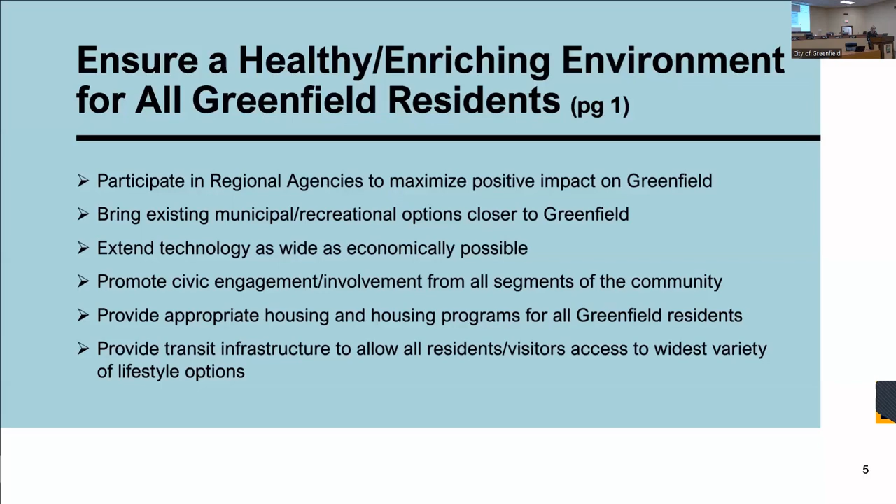The city is maintaining parks in best practice forms, offering a wide range of sports and recreation programs for youth and adults, offering a wide range of educational and cultural programs for youth and adults, and pursuing green initiatives that are sustainable and eco-friendly. The city is providing a healthy, clean environment in which to live and providing community outreach efforts to secure resources and help those in need.

The city hires the best qualified employees, balanced with the desire to hire local people that are also bilingual. We are striving to keep training existing employees to be first-in-class service providers and follow best practices with personnel policies and procedures.

The city is increasing and maintaining transparency between all staff, leaders, and the public, implementing best practices for all internal processes, putting all city assets to the highest and best use, and enhancing revenue sources.

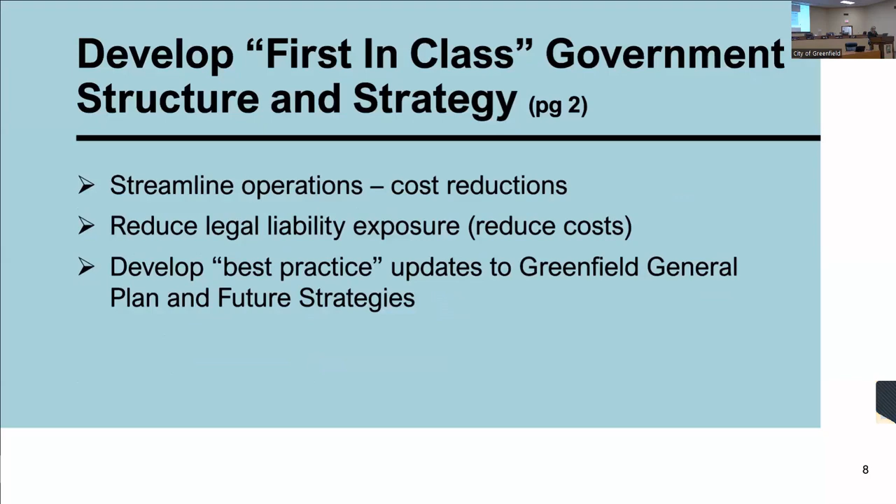The city is also streamlining operations in order to provide cost reductions and efficiency. We're looking at reducing legal liability exposure and developing best practice updates to the Greenfield General Plan and future strategies.

I'm here tonight to talk about water and wastewater. So for our utility overview, we have a wastewater collection and treatment system, and we also have a water supply and distribution system.

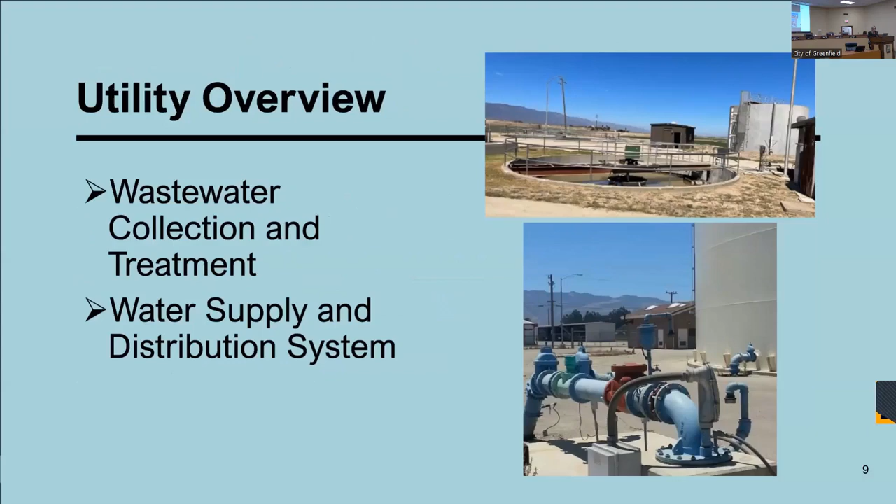I'm going to talk first about our wastewater collection system. The city has an ongoing wastewater master plan. It's a dynamic document, and the last update we did on that was in May of 2021. It prioritizes current and future collection system needs.

The city provides service to just over 3,800 customers who are connected into the sewage system. It also provides a prioritized list of recommended projects with associated budgets.

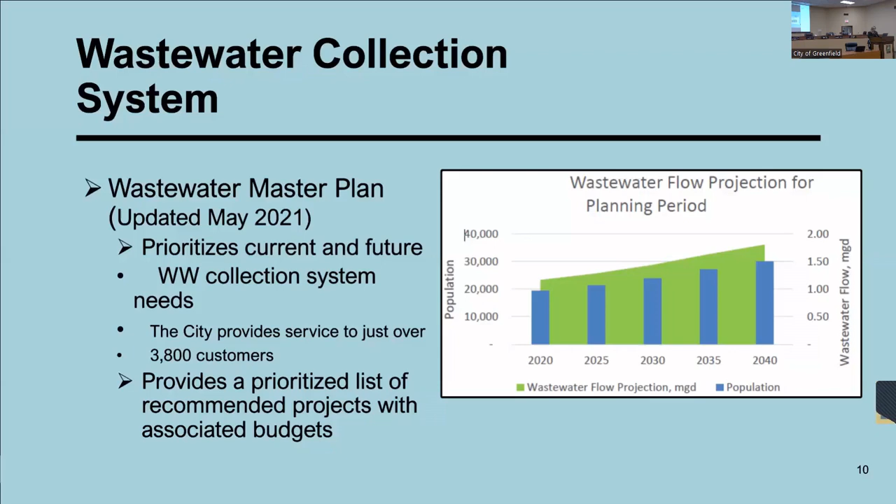There are different components to the wastewater collection system. As I mentioned, there's over 3,800 private lateral connections from properties to the sewer mains. There's a total of about 31 miles of sewer main line, ranging in size from 4 inches to 24 inches in diameter. We have 6 wastewater lift stations and countless sewer manholes.

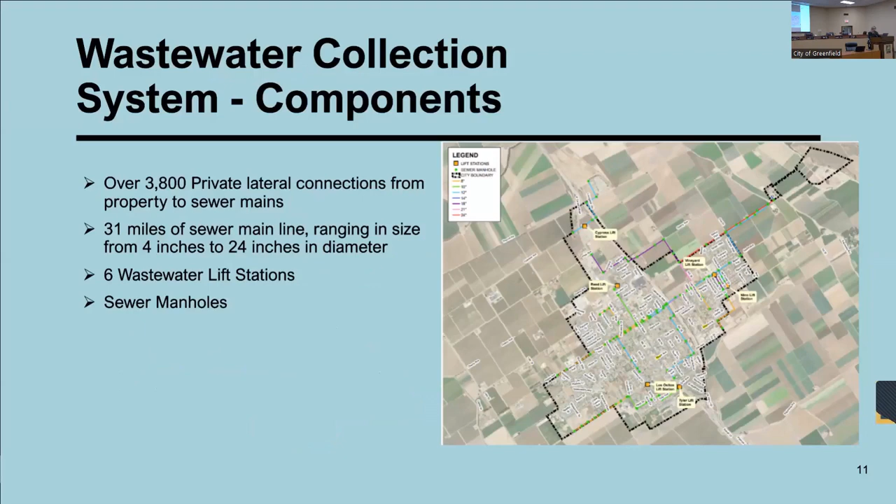What is a sewer lateral and a sewer main? A sewer lateral is the run of pipe between your building, your home, your business, and the city's sewer main in the street. All the waste in your home or business eventually goes into the sewer lateral, which then carries into the sewer main. A sewer main is the primary pipeline in a wastewater collection system that runs under the public street, collecting wastewater from the lateral connections.

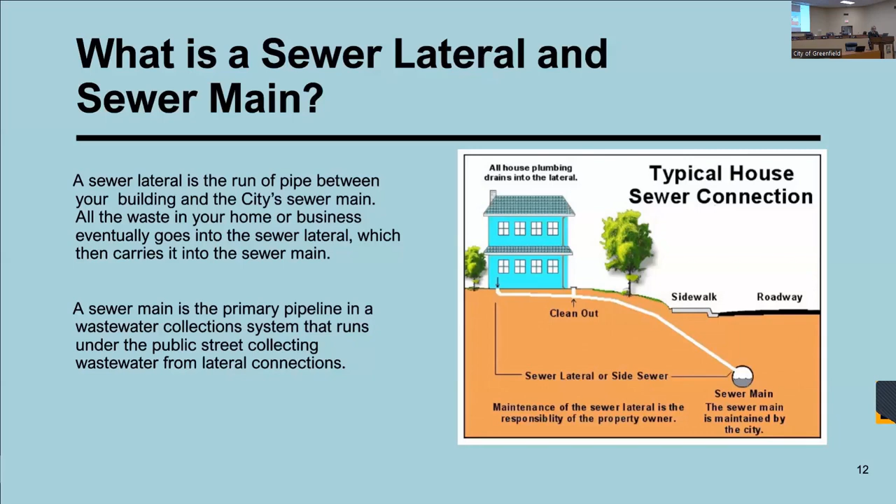What is a lift station? It's a term that not a lot of people know what that is or what the function of it is. A lift station is a facility designed to move wastewater from a lower elevation up to a higher elevation through pipes. Key elements of a lift station include a wet well, pumps, piping, valves, motors, power supply, equipment control, and alarm systems, and also odor control and ventilation systems.

This is to alleviate all of the different elevations that we have. Some houses are up higher than others in developments, due to the topography of the land. So the goal is to get all safely to the same place.

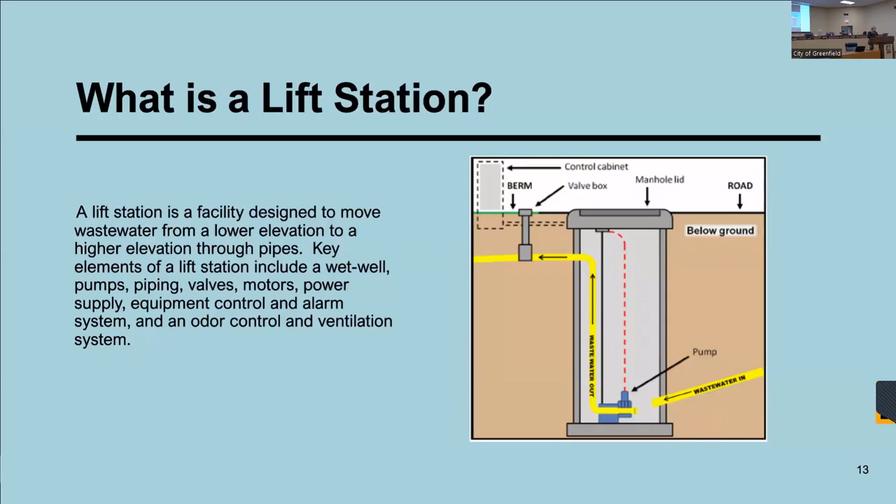The wastewater collection system prioritized strategic plan has a lot of different components, and these are some of the main ideas here. The wastewater collection system master plan was completed in May of 2021, as I mentioned. That identified deficiencies and projects that the city needed to address. So those identifications have been completed.

The next item is to secure funding. How are we going to pay for these recommendations that are deficient and for projects that need to be constructed? There are many different funding levels. There are development impact fees, so every time a developer comes in and builds a home or many homes, there's a fee associated with wastewater, and that goes into future building of wastewater facilities.

A wastewater rate study periodically will be done, and I'll get into that here in a little bit, because everything is dynamic. We have to figure out what our financial needs are to keep the system running for the residents. And then there's grant funding. The city is constantly applying for grants. Grants are an amazing funding source for all aspects of the city.

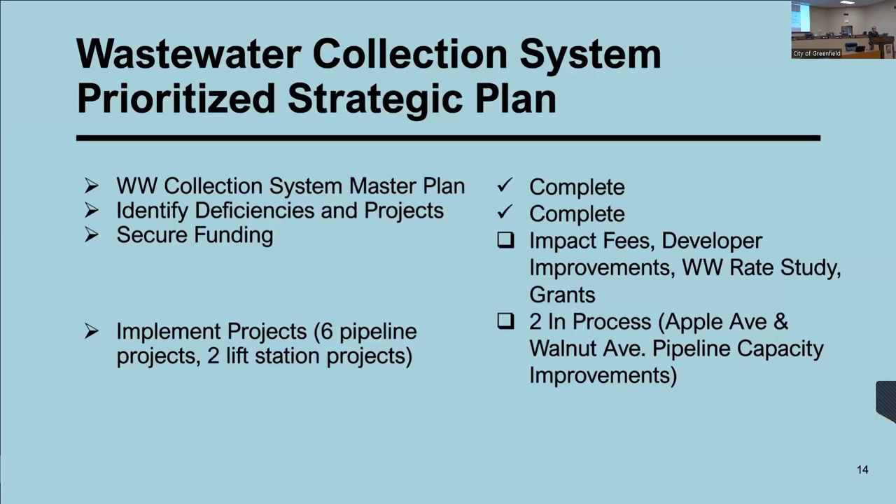This next chart talks about the budgeting of the strategic plan for wastewater collections. There are areas of the city that require new sewers. Again, a lot of these are upsizing and retrofit projects. So we have 10th Street from Apple to Walnut, and then we have a total cost.

Mind you, these costs are from the master plan in 2021, and we all know right now that costs are changing with material prices rising. So these are effective as of that time. Walnut between Francioni and 10th Street needs to be upsized from an 8-inch line to a 12-inch line, and that's to account for development and the need for larger capacity to capture all of that.

Walnut from 12th to Francioni, 12th Street from Apple to Walnut, 10th Street from Walnut to Cherry, Cherry from 10th Street to El Camino Real, and El Camino Real from Cherry to an existing manhole in El Camino Real just north of Cherry. So there are quite a few things identified, and we'll be putting plans together once we can get the funding. It is strategic.

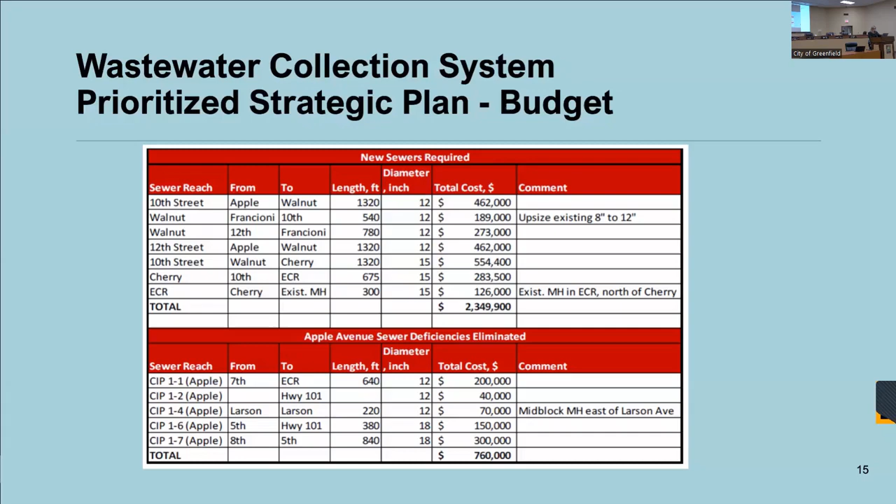So we do have a lot going on with wastewater collections. Keep in mind that's what's going out to our wastewater treatment plant. Because once we collect the wastewater, what do we do with it? It goes to the wastewater treatment plant, east of town on Walnut at the very end. You'll see some silos out there, and that's the beginning of it.

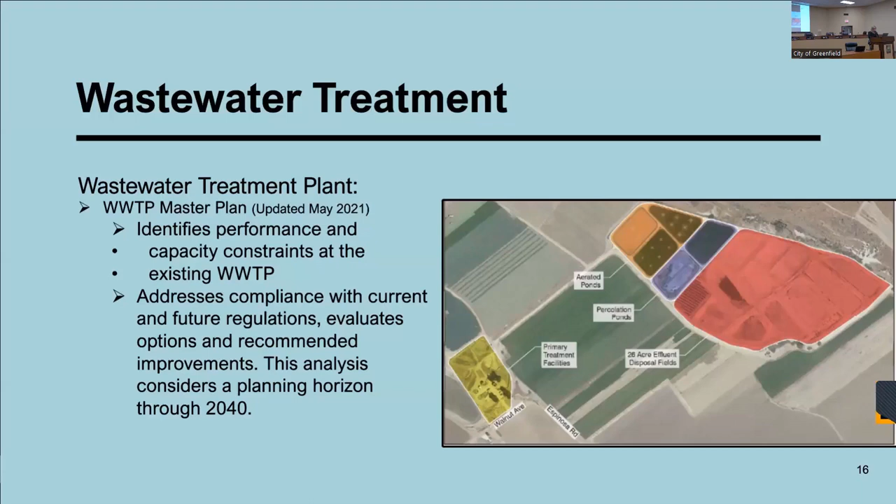In 2021 we also had our wastewater treatment plant master plan updated. It identifies performance and capacity constraints at the existing wastewater plant, addresses compliance with current and future regulations, evaluates options, and recommends improvements. This analysis considers a planning horizon all the way through 2040.

Well, what is wastewater treatment? General public, anybody? No hands in the audience. Any hands on Zoom?

The city's wastewater treatment facility is classified as what we call secondary treatment. Secondary treatment is the removal of biodegradable organic matter using a microbial community. So I've attached a little schematic of what the flow of wastewater would be.

It's a little bit small, my apologies. I can't read it either up there, but please feel free to look at this after the program and zoom in on it. It gives you an idea of how we here at the city are treating our wastewater. We actually end up, at the very end, with ponds, percolation ponds, after many cycles of treatment, and it goes back down into the groundwater, and it's clean.

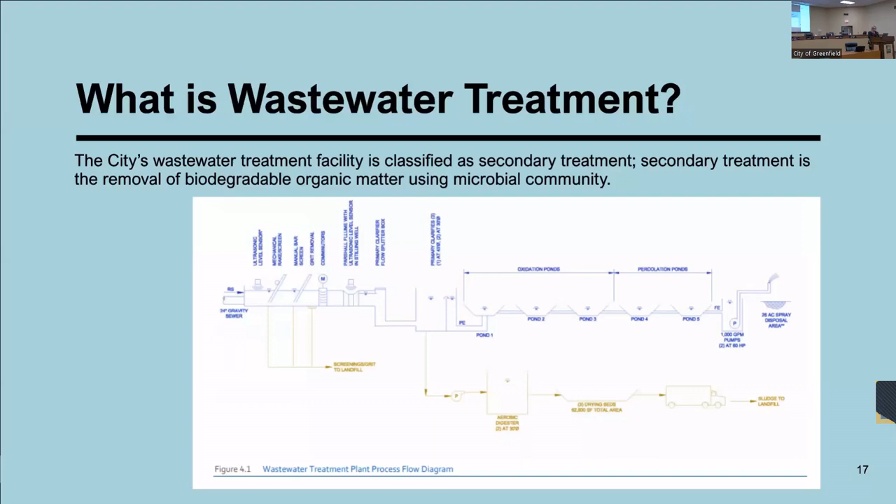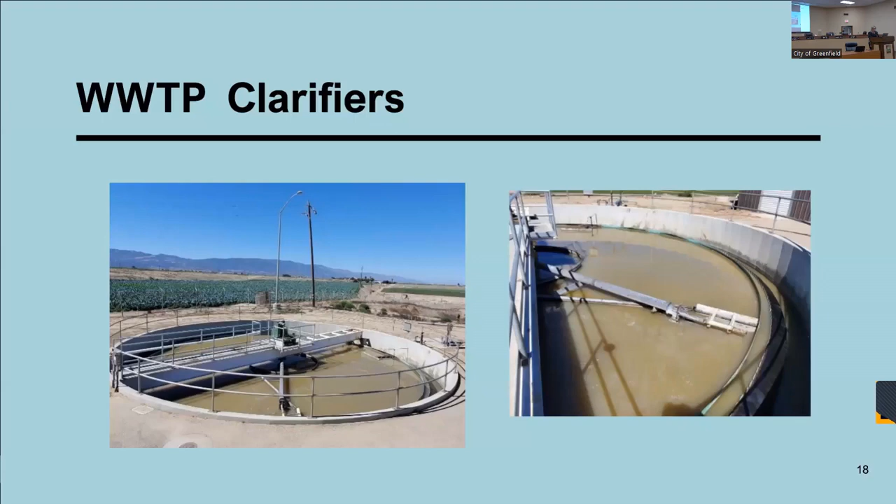Again, impact fees, the enterprise fund - when you're paying your fees for your sewer every month, that's going into the enterprise fund, and so you're helping to fund this wastewater plant and its upkeep. The state water board, who we are under permit from, has actually given us a verbal commitment to provide almost all of the funding for our new wastewater plant. The city has already submitted their application, and now we just wait till it's reviewed and have to give some other information. So it's very exciting.

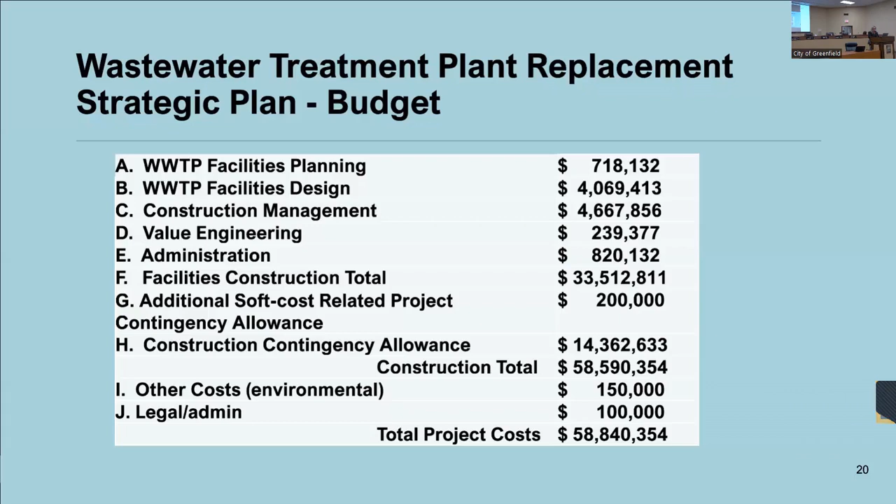So now I'm going to switch over to water supply and distribution systems. The city did an updated water master plan because everything's dynamic and things keep changing with different size systems, priorities, and old pipes. That plan prioritizes the current and future water supply system needs and provides a prioritized list of recommended projects with associated budgets.

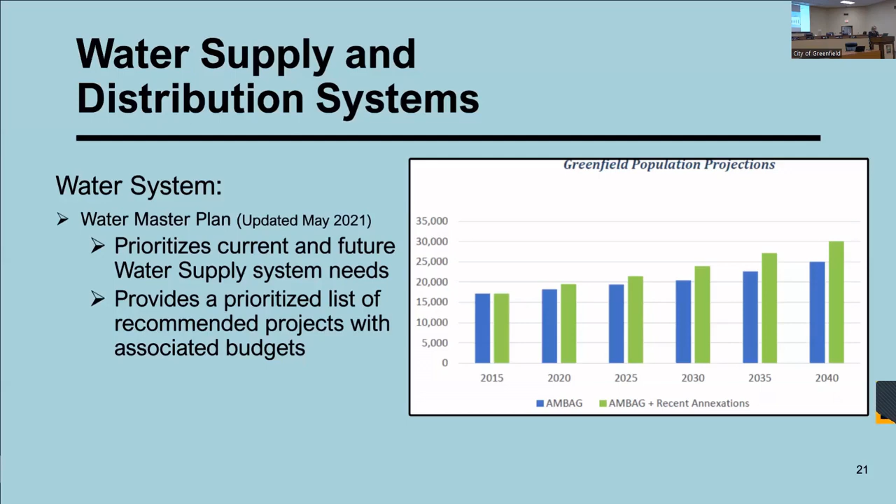As you can see, I've added a population projection on the growth of Greenfield. Each year it goes up slightly because we're annexing more land, which means the city is actually getting physically bigger past its original boundaries. So, just like wastewater, to account for that there will have to be installations of new water mains, distribution lines, and maybe a new well, which I'll be talking about as well.

Water distribution has different components as well. Currently the city has 3 water well sites and 1 future well site that we're in the process of designing and procuring the property for. We have storage tanks - 1 million gallons and 1.5 million gallons, that's a lot of water. And then we have 2 booster stations, and over 3,800 lateral connections from the water meter to the water main.

In total, we have 36 miles of water main line. If you think about the size of our city, that's a lot of underground piping, in addition to the wastewater.

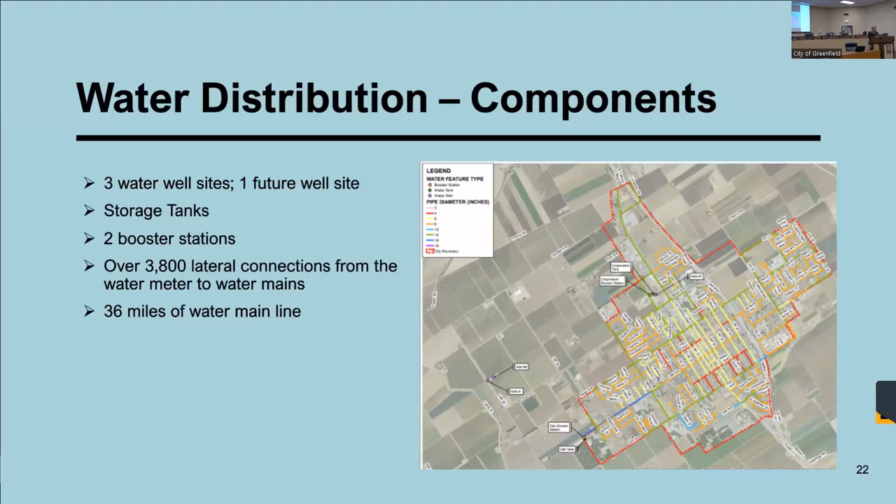What is a water well? Anybody?

A water well is a hole or shaft used for the purpose of extracting groundwater in underground aquifers. The water is drawn up by a pump using containers called bowls, which are similar to small buckets, and they're raised mechanically. The depth of water can vary greatly.

In the city, our wells are roughly 300 feet deep, between 250 and 300 feet. There are many wells that go even deeper, to 800 feet, and we have such a great water supply of groundwater that we don't need to do that, which is wonderful.

A water well, well water typically contains more minerals than surface water and requires treatment. The city treats our well water with chlorine, and it must be maintained at certain levels to ensure the water is healthy for consumption. We're regulated by the water board, and our staff is always checking to make sure we're dosing properly, not too little and not too much.

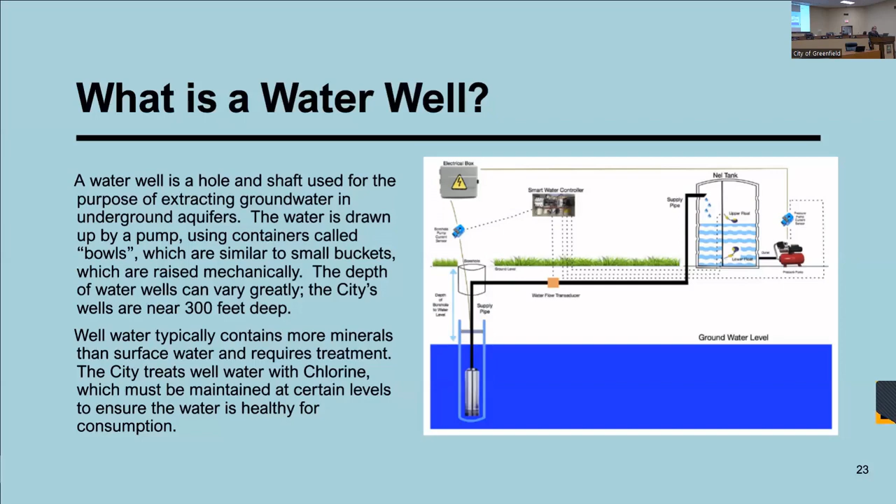A storage tank is where the water produced by the water well is stored for consumption. When a customer turns on a water faucet, the water from the tank lowers as it's fed into the water mains, ultimately to the customer.

Booster pumps are used for pumping the general water supply from the storage tank to the consumer. The pump generates pressure, and that water is carried all the way up to your faucet. That pressure needs to be maintained in order for it to go through all these pipes and come out with pressure at your faucet. That's really key with these booster pumps, that they're able to function and keep up with that.

We have some very good running booster pumps. We also have some that need maintenance. And that's where all these programs come in, with our staff that we rotate out.

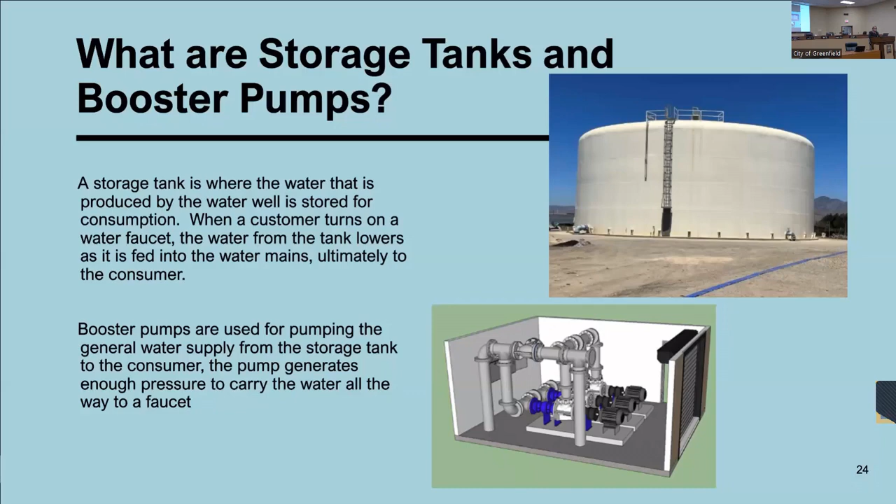What's a water lateral and a water main? Nobody? Everybody's sitting in the back of the class.

A water lateral is similar to sewer. It's a run of pipe, but it's from the water meter to the city's water main. That is the city's responsibility, from the water meter to the water main in the street.

So that internal pipe work is the service, and that's the homeowner's responsibility. From the meter back to the main is actually the city's responsibility on water.

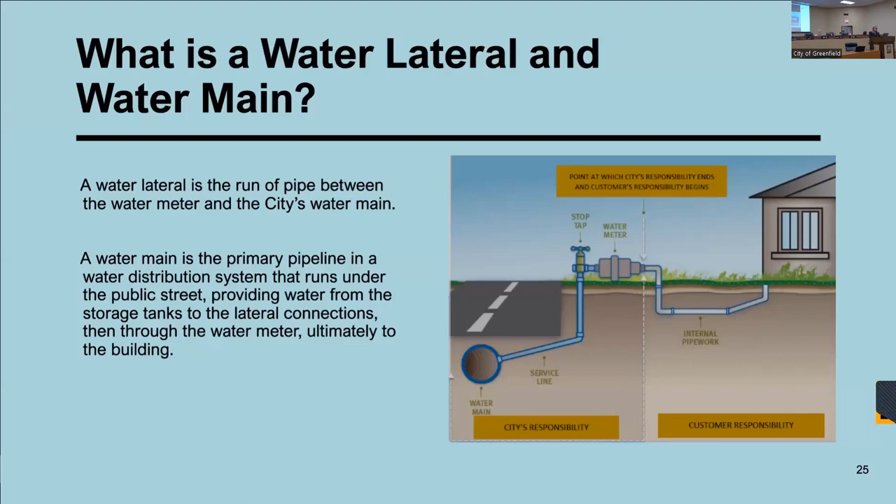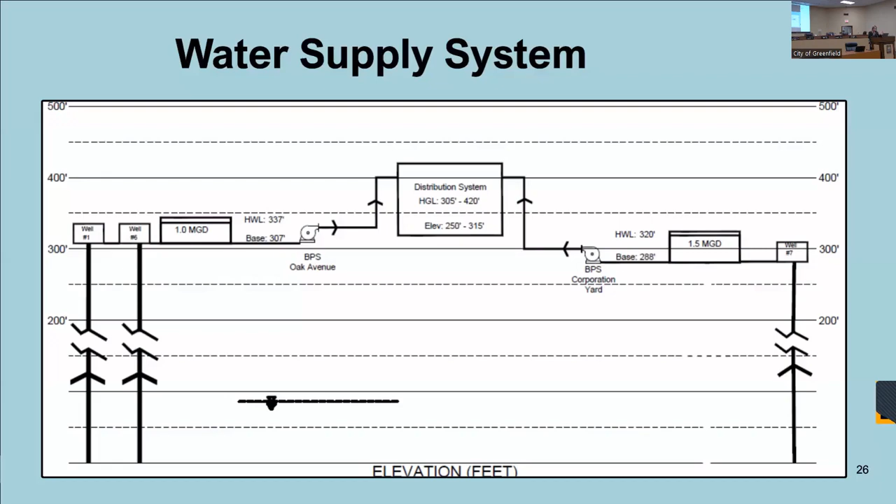I also wanted to include what the distribution system looks like, just as an overview. We have a lot of different size water mains, and you can see on this colorful rendering what the distribution system is. So there's a lot of pipe under that ground, and we're responsible for keeping it maintained, keeping the water flowing, and keeping it safe and healthy.

And these are just the mains. Yes. Sorry, don't mean to interrupt, but I'm just wondering what the different colors mean. Absolutely, thank you, good question.

So the dashed red line on the outside of everything, that's the city boundaries. The different color lines are the different pipe size diameters, just a recordation of what size. For instance, this faint orange, a peachy color, is a 3-inch line. The red is a 4-inch line. The yellow is a 6-inch line. The green is a 12-inch line. So those are indicative of what size the water main is.

Yes, diameter. There's also little circles, which you probably can't see right now, but the orange circles are booster stations. The green little circles, there's only 2, those are the storage tanks. And then we have the purple little circles that are the water wells. 2 of those are outside the city limits.

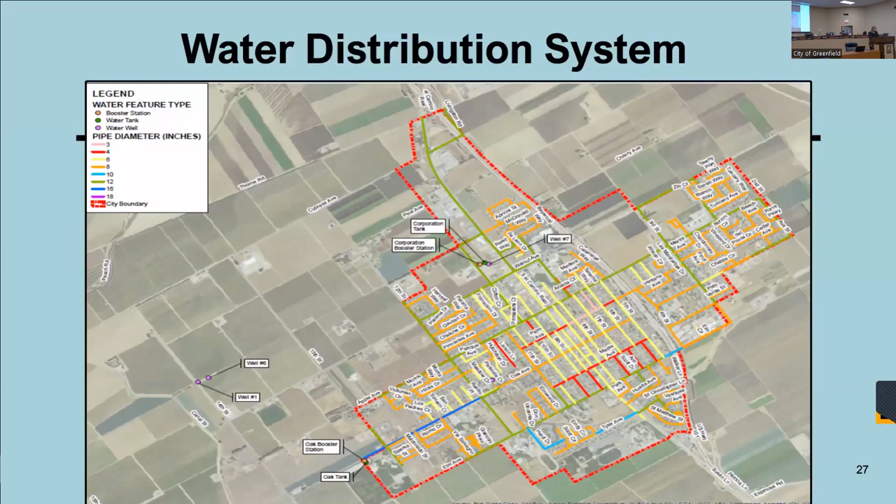Question? So, water supply and distribution system prioritized strategic plan. Like I said earlier, the water distribution system master plan is complete. It also identified deficiencies and what projects need to be done, complete.

Our favorite topic, funding. So again, some of these items are coming from the impact fees. Developers also provide the improvements when they're developing. We have the water rate study, and we currently have $7.5 million at 50% grant secured. So we're getting 50% of that, and then we match for some of these projects.

Implementing the projects, what's next? So there's a new well, a new reservoir, and pump station for priority 1 items. I'll get into the priorities. And 6 priority 2 water pipeline projects.

Priority 1, the highest priority. Currently, the new well is in process. I mentioned it earlier, that we're looking at getting an easement, and we're negotiating with the property owner whether it'll be an easement or purchase.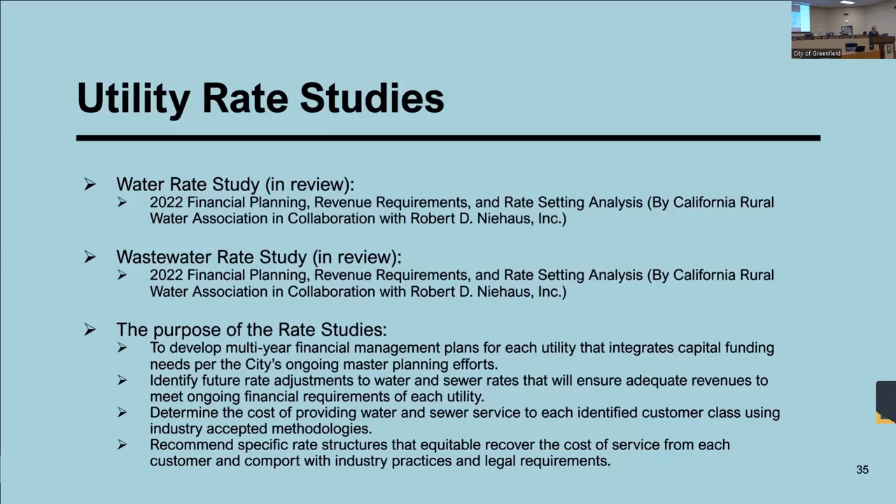What's the purpose of them? Why do we do these cyclically, every so many years? It's to develop multi-year financial management plans for each utility that integrates capital funding needs for the city's ongoing master plan efforts, so everything correlates together. We have to identify future rate adjustments to water and sewer rates that will ensure adequate revenues to meet ongoing financial requirements of each utility - that's staffing, maintenance, repair, replacement, capital projects. Then we determine the cost of providing water and sewer service to each identified customer class using industry accepted methodologies. It also recommends specific rate structures that equitably recover the cost of service from each customer and comport with industry practices and legal requirements. So in general, we're not just raising your rates to raise your rates - there are specific reasons for any rate adjustments, whether lower or higher.

This is just a little overview of the water rate study that's still in review by staff. They did a local water rate comparison, and if you look, everything's from lower to higher. Greenfield is the yellow bar there at $44.90. We are below average - average is $68.78. There have been some options recommended to us by the consultant that drafted and did the research for this rate study. We have not committed at this time, and haven't taken it further to the public because we are still in review, but I did want to show that right now we are below average.

We just need to make sure that we're able to financially cover the city's maintenance of these facilities.

I have a question, just out of curiosity - I can't quite see that one on the far right. Can you tell us who that is? Yes, that is California American Water, CalAm. Okay, and where do they serve? Is it all over? Yeah, it's an average of all of their areas. I do not know for sure if this is specific to the Monterey County area, because I know CalAm does service part of the Monterey County area within some of the cities.

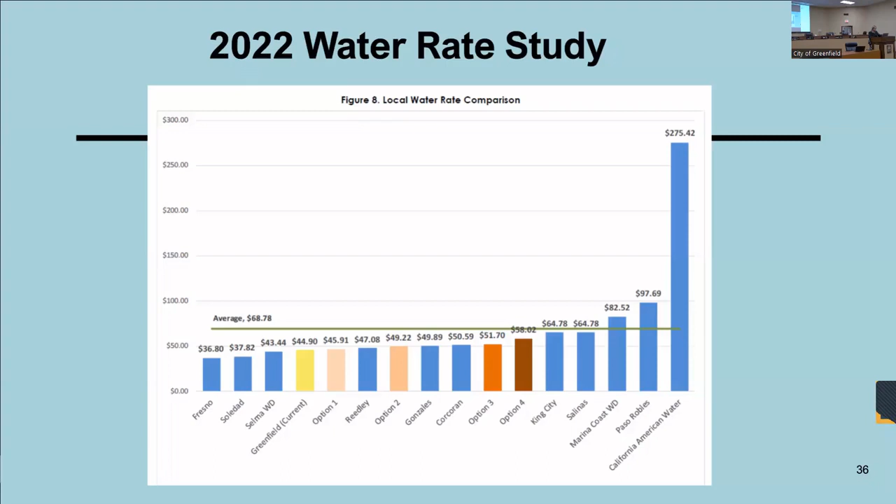Again, same type of chart for the wastewater rate study that has not been finalized - it's still in draft form and staff review. It's set the same, lowest to the left, highest rate to the right, and then you see that green bar, that's the average. So once again, Greenfield is in yellow, we're at $34.15, which is below average, the average being $46.53.

There have been different options recommended to the city. Some are in the peachy orange color, some very near what we are charging now, and then of course there's one way over there to the right. So staff is looking into all of that to see what the justification is for each of those options. But as you can see, we have a really good rate right now. We're just looking at what works best for the city and the community together, and we'll be bringing that to council here in a little while.

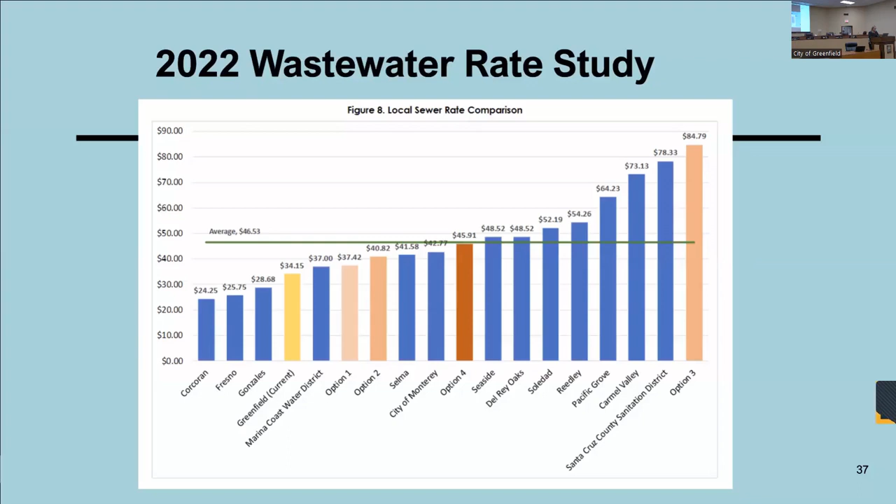We have 4 full-time utility systems operators. In general, we have them separated at water and wastewater. We do have support staff. I have a full-time executive assistant and a full-time public works office technician, and they support not just me, but the crew. And we do have vacant positions right now. We have a full-time utility operations manager and a full-time water technician, soon to be advertised.

Utility crews, the primary responsibilities. Water supply and distribution, they're taking care of water mains, water services, hydrants. We didn't even talk about fire hydrants, and water valve maintenance. Water meters and their maintenance, inspections, reservoir maintenance, which is a storage tank, pump station operations and maintenance, and well operations and maintenance, which is water production.

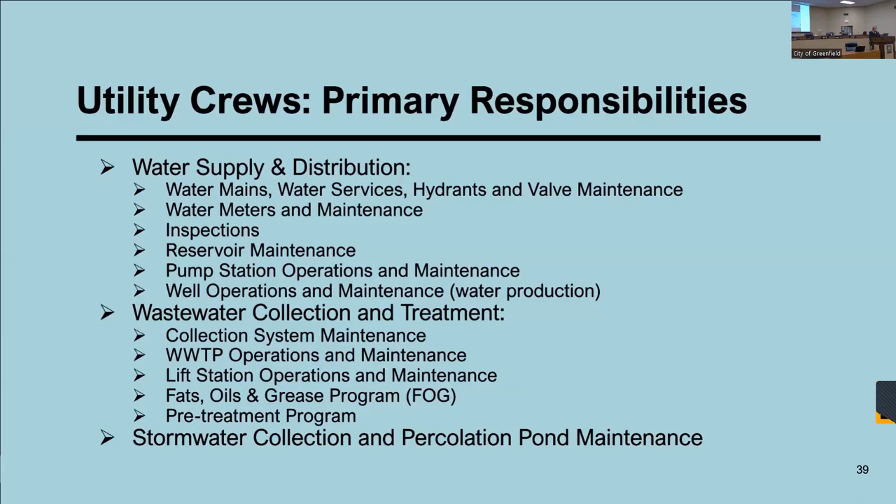And so that clogs the sewer system. So we really like to advocate that any fats, oils, and greases, that you let them harden up and put them in your trash.

I want people to grow with the city. We teach leadership skills and cooperative skills and how to work with each other in the departments. So I am all for promotion, and I would hope that the community would like that too. And then we can bring in more community members as staff.

Seeing none in the audience? I see a question here on Facebook. Why does my water smell like rotten eggs every morning when I turn on the faucet? I have to let the water run for a minute every morning.